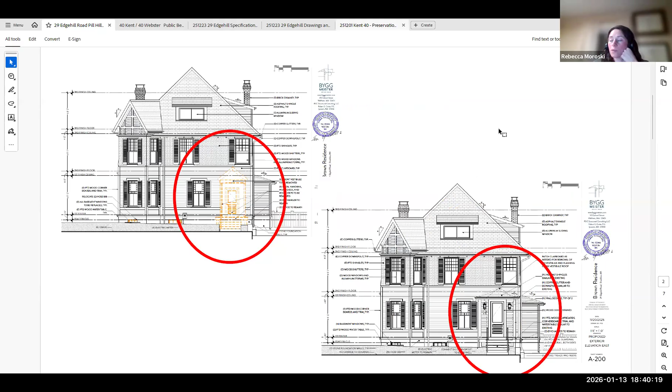Here at the top, we have the existing vestibule, denoted in the orange dashes, that will be removed, and at the bottom of the screen is the proposed new vestibule. Here is a site plan showing the increase in square footage of the vestibule, along with a photo of how it currently looks.

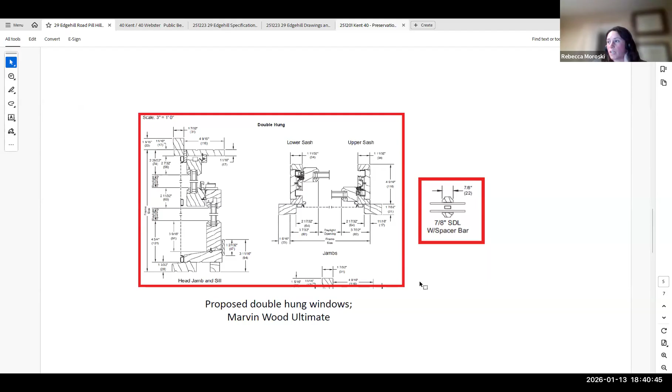Here again are some side elevation photos that also have the materials noted to show what the new vestibule will look like. I've included here the provided specifications for the windows, and here we have the proposed gutter style, shingling style, and door style.

And again, for materials, we have the decking boards that are proposed to be used, as well as the handrail they are looking to replicate for the new construction. At the bottom is the proposed lighting feature. That concludes my presentation, and I do have the full plan set and specification package handy if commissioners want me to pull up anything specific during their discussion.

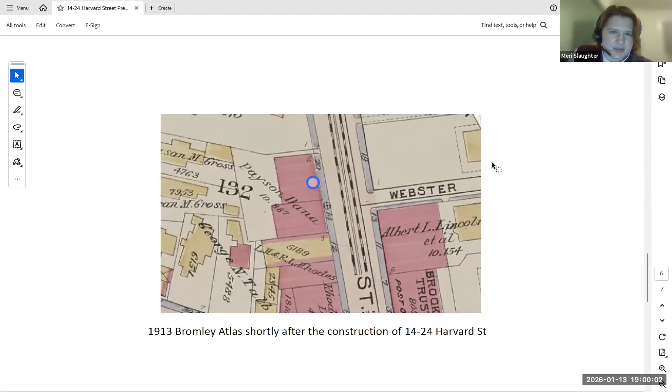Here are some photos of the side and rear that show those arched lintels. Just a quick atlas to show it from 1913 as it was completely constructed. And we were able to see some proposed elevations from that 1990s restoration of the building.

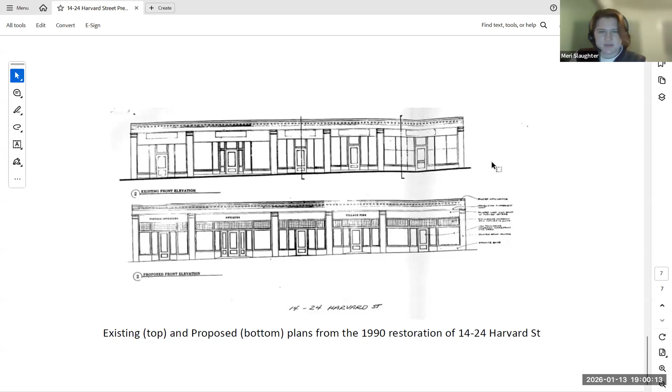And that is what I have for the significance report. I'm happy to pull up anything if you guys would like. And I do believe there are representatives here.

Yes, Bob Allen is here if you guys have any questions or if you would like to speak. Thank you, Meri. Mr. Allen, would you like to speak? If I may, Madam Chair, members of the board, for the record, my name is Robert Allen.

I have a law practice at 300 Washington Street in Brookline Village. I'm here with Richard Tuck, who is the owner of the property. Actually, much of what you see of this building from the exterior, from the streetscape, is Mr. Tuck's doing. It was pretty much changed over in the 90s, and it's now pretty much a group of restaurants.

In order to really have the restaurants work there, the issue was you open the door and the wind comes flying in. So some of the doors had to be recessed to try to figure out a way to block the wind coming in. Before it was just open the door and there were curtains there, and the tenants were really having trouble with it. So I understand it's an older building in an older town, built in 1910.

But if you really take away the work that was done in the 90s, it's a one-story brick building, right? That's just a shell of a building and there's nothing special about it in the back of it or below it or anything like that. And it's time to look at alternative options for the building. Certainly if it's found not significant, it gives us the opportunity to move quicker to look at other opportunities.

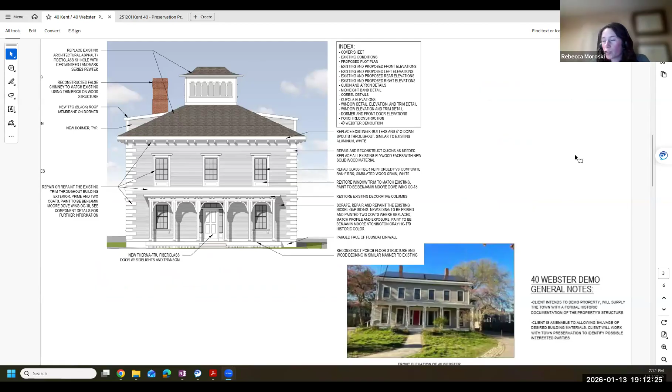Commissioners should have received the preservation package prepared by the applicants. It was the same package seen at last month's hearing. I also have a cover sheet and the 40 Webster building for reference as to what package commissioners should have been reviewing, and some of the language from zoning, which I can pull up if there are questions later or if commissioners want to spend time on it.

Tonight we also have Maria Morelli here to assist and answer any questions. She is the senior planner for zoning and regulatory. And we have a bunch of people from the project team here able to answer questions on the more architecturally specific elements of the preservation package.

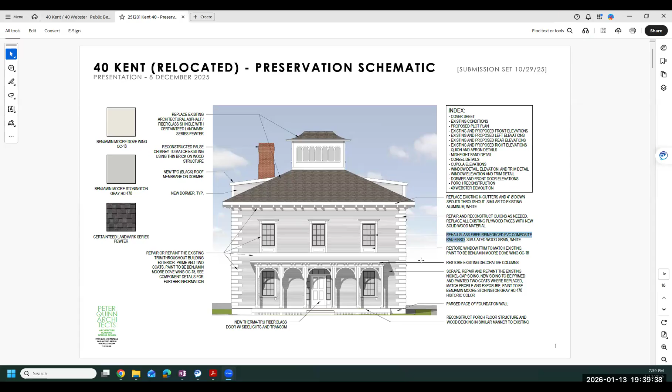It's a set back on the other side of the dormer. Right, yeah, so towards the rear of the site. If you go down a few pages, you'll find it more detailed. One more, I think.

I know the neighbor in the rear would be happy if the chimney was gone. For what that's worth, he's mentioned it.

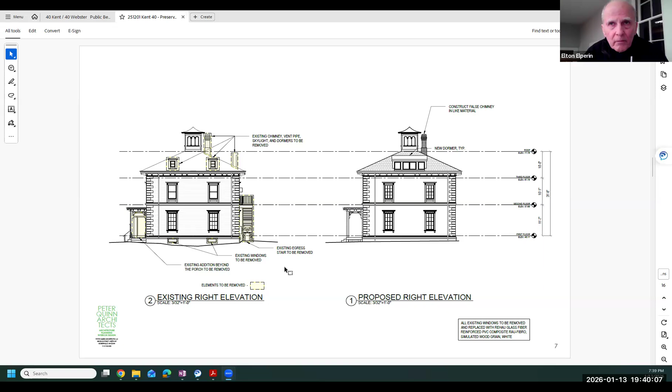I could live without the chimney. I hope Judy Selwyn's not listening to this. You'll have a phone call waiting for you, David.

And I think actually the siting of the building is really an improvement to where it was, because you really appreciate the front loggia. So I think that's a good thing for the building. I would support moving on this tonight and moving towards a letter tonight.

I'm glad to hear that, and I want to poll the commissioners to see if people are on the same page. I'm trying to figure out what's left in the list of feedback that we want to call out in the letter.

One of the only other things I might comment on is the difficulty of the restoration plan as called out. Much of the ornamental work and woodwork is called for basically retaining, but scraping and patching is required. But it doesn't highlight the extent of repair versus replacement. There are some things that may require replacement as the work is done, and I don't know that I'd recommend Fypon as a replacement rather than more traditional epoxy wood fill. That's one of the only other things. I think the intent of retaining as much of that and repairing it as possible is wonderful, and I'm hoping we keep as much of it as possible as good sound old wood.

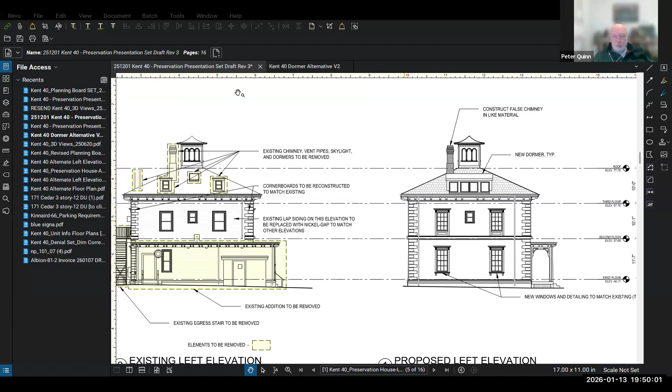We since took a look at this and thought, what if we just left these dormers where they are and try to span between them, maybe with another dormer? Let me just show you what we were thinking about and see if that is acceptable.

So this is kind of a trick of the eye, where the dormers are set up to look like regular dormers, but then there's a wall between them that's recessed behind it. That wall has the roofing material on it typically—it could also have clapboard. We'd like to do it in the wall. If this is a textured asphalt, we would probably carry it up or something similar to it. And then there's a flat roof that links them all back to the hips.

This gives a nice composition to the whole setup of windows and dormers, and also gives us headroom in our layout. So we have the existing dormer here, and then we put a duplicate in the middle and connect them with a raised ceiling. Then we do the same thing mirrored on the opposite side. Just as a quick layout of the third floor—kitchens and other elements haven't been added yet, but you can see there'll be a bedroom back there and so forth.

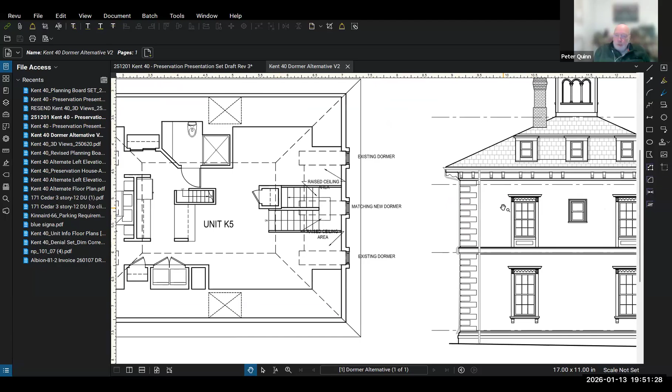And remember, these are also now on the side of the building, not facing the street, so they're a little less visible, and certainly the one on the opposite side you would hardly see, because it's facing the new building. But that was what we wanted to suggest as a response to the comments that have been given by the board, by the commission.

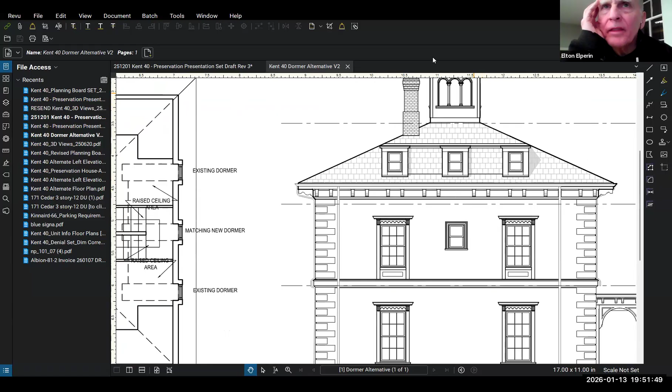I think that's kind of interesting. I mean, is it a very low slope roof now for the dormer? The dormer is essentially flat, it's essentially just... Could they be higher than the previous dormers? No, this is the same height. Same height, same dormer. I see. Yep, but just framed out to match.

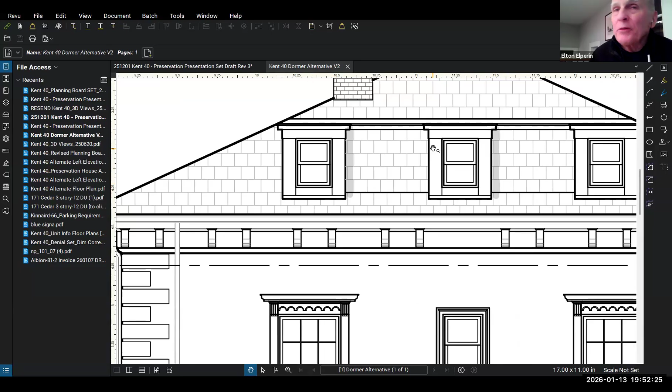By the way, that material is called Boral, B-O-R-A-L, which is wood with a fly ash in it. That makes it easy to make these shapes, and they resist rot and all that. Is it possible to make the windows slightly larger and the casing slightly narrower? You mean to modify the historic fabric? Yes, of course, they could be a little bigger. But what do other people think?

You're saying get rid of the original? I mean, they're preserving the original dormers there. But are they really? How can the original dormers have no slope? Yeah, they really don't. I've looked at it - it could be like a sixteenth of an inch, or a little crown in it that you can't see. I think that's one of the odd things in the new elevations, that the shed slope is so prominent. Maybe in reality it's not, because seen from the ground, it's the trick of the elevation.

When you look up, you can hardly see it. Peter, are you getting adequate head height and thermal performance of the roof there? Yeah, the floor level is actually quite a bit lower down here - much lower. So these would be almost functioning like, you know, you fit a bed underneath it. That kind of height.

Could you show the old scheme as well as the new one? Just give me a second. This being the old scheme.

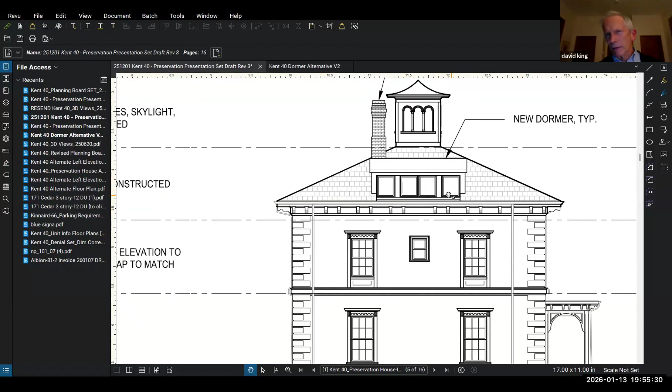Isn't the older dormer thinner? The old one was 13 feet across - it sort of lines up between the windows. This one goes to the edge of the windows, the new one goes to the edge of the windows. So from the front of the building, wouldn't you perceive the altered one more than the original one? It's closer to the existing condition though.

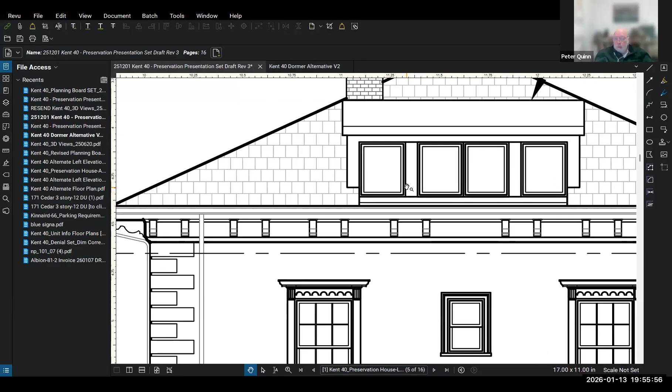I think this one may be missing a little bit of trim here, at the corners. But we were changing the slope to be a little steeper. The whole new dormer - the old dormers, which are right here, would be removed and the roof would be rebuilt.

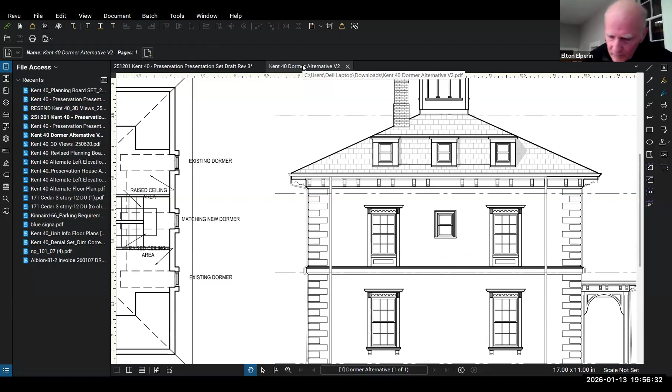This that we're looking at now is such a different animal than that. I think this kind of odd triple arrangement is better - it's more in keeping with the historic house. Nice to have the windows relate to what's below. This whole thing really is built on these simple symmetries, all through the whole thing.

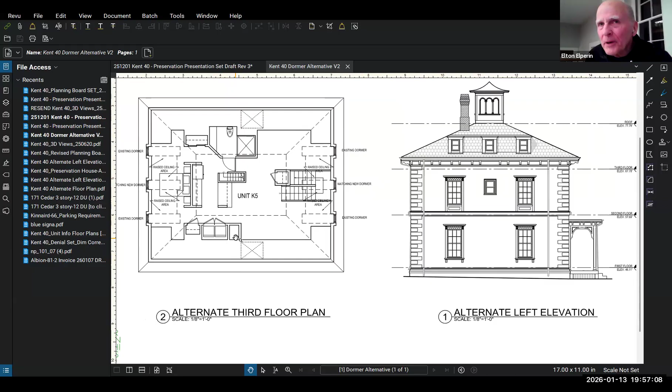Well, if it's enough light for them up there in their bedrooms, I think it makes us happy. This cupola up there - is that gonna give light? Oh, really? So you have glass up there behind it - what do you have, a skylight? The arches actually have glass behind them. Wow, good Lord. Is there an amazing space up there? Is there a stair up there? Yeah, there is.

Good rental unit for you someday, Elton. Couldn't afford it - give me a call.

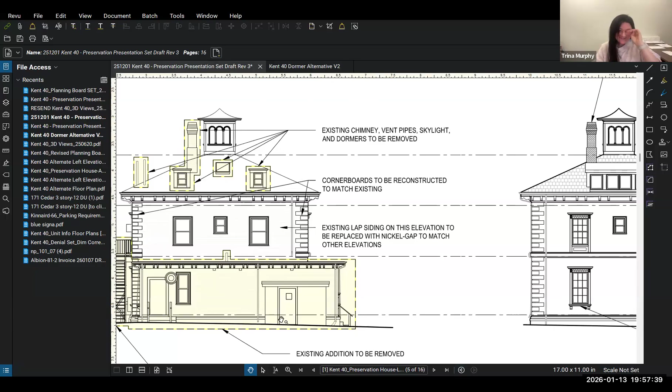Okay, where are we - is there anything else, architects or other commission members? We have this nice opportunity where we have the architect to explain things to us. Anything else we want to get into before we move forward on this? We've talked about the dormers, the desire to move the property slightly over which would be difficult, the chimney, and the windows.

Do we need to talk about how the awnings relate to one another? That was something that was brought up as feedback. Can we see that? Is that in somebody's drawings - you mean the 3D model? Okay, yeah, just give me a second.

These are not fully rendered models, just more like massing models. But this is our envisioning of the plaza without landscaping in place.

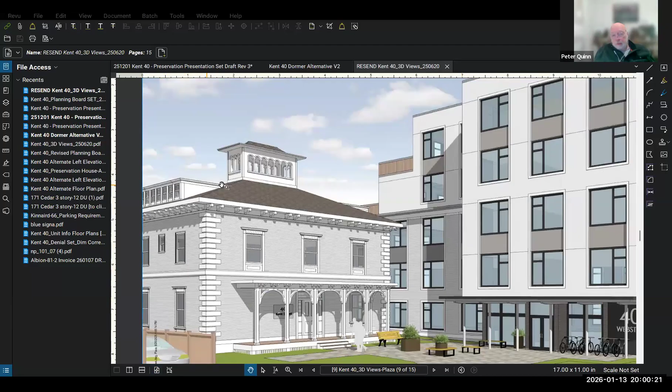By the way, you can see the dormer that we were originally proposing off here, and even with the added slope, you don't really see the top of it.

I don't know what the right solution here is, but you have the lower awning on the higher building and the much more elaborate detailed awning on the historic building, which I guess makes sense. But I think we're worried that if we brought the new building up here, we would immediately start to dwarf this.

I think if you look at it from the point of view of the pedestrian, there really is a hierarchy between the two—the historic building has the greater presence in the plaza. But you know where the entrance to the main building is. It's kind of doing both things at once.

When I first saw this, I wondered if you could go awning-less in the new building. You do have a recess to the doors, and then there's a projection of the entry vestibule that could maybe be reduced a little.

I know you like the idea of the columns echoing the columns in the historic building. Do you think they compete to the detriment? Maybe it's okay.

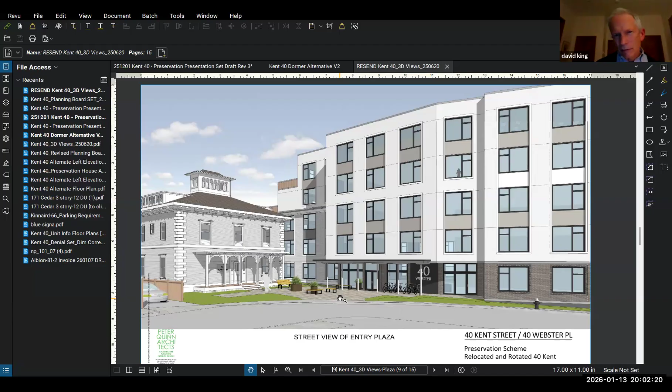I just think it looks kind of bare, the new awning. Maybe it's just a question of how it's detailed, and maybe it'll be more elaborate and interesting as it goes into construction drawings. It's definitely a very simple schematic, and the other one looks so ornate.

Well, I think the whole entry facade could evolve and become more elegant. Maybe it would lose its canopy and its columns and become something else, because I've certainly seen modern entrances which are extraordinarily beautiful.

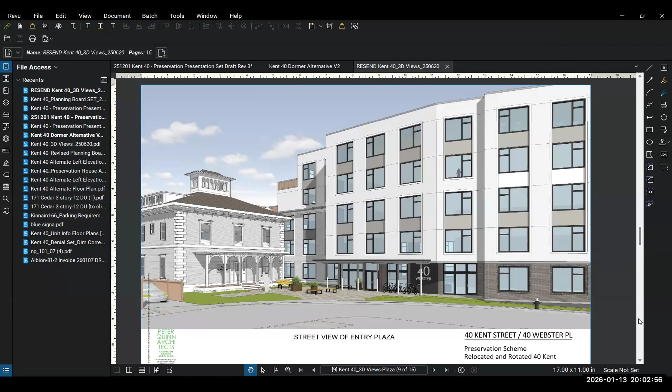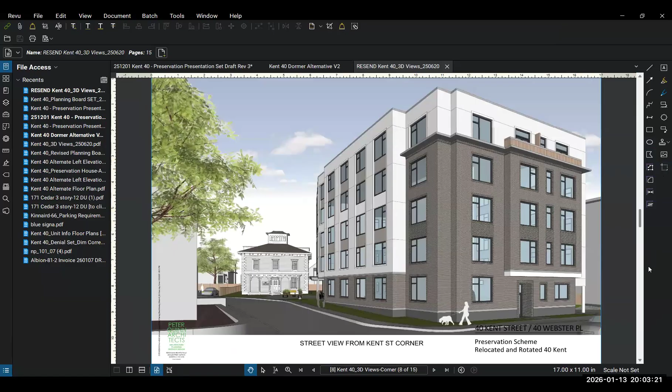I think the DAT has had a number of iterations of this condition—this is maybe not the last one or the favored one, but I think it's interesting to hear this response to it. There's been some study of this, and I think it's worth noting. I'm not sure where we're at in terms of making everyone satisfied with it.

I think it's really close, but maybe the door should be higher, the mullions thinner. It's just, I don't know, the projection of the vestibule—you need the airlock, I guess, but I don't know.

We could have the planning board revisit that. I want to echo what Peter Kleiner said, that there was an effort to make the new building a backdrop to 40 Kent.

So it would not compete with it in terms of the hierarchy of the canopies, but actually have elements that would speak to each other so that they would look associated. Because if you look down Webster Place, there is kind of a welcome to this building—that canopy announces it's a residential entrance and a welcome to the people who are going to be occupying that residence.

But I think what's important for us to hear is whether anything about that canopy is competing with or overshadowing the historic structure, because that will be key for the planning board and the ZBA to hear. But we can also take your suggestion about revisiting the relationship of these two canopies.

No, I don't think it overshadows it. Okay, that's important to know. I think it is competing, but I'm not sure—have you tried it without the canopy? Yeah, we have, and it's just kind of like a lack of presence.

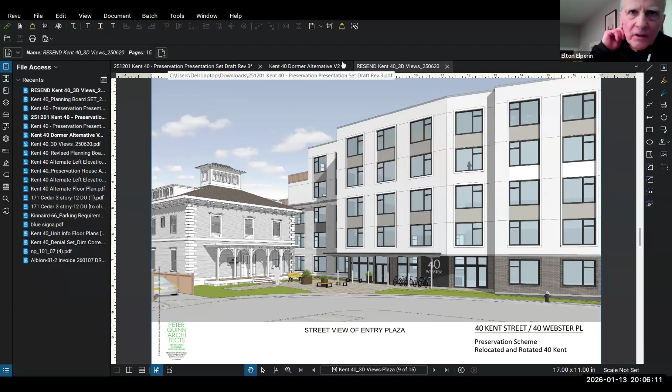You might also not be seeing the landscaping. There's really a beautiful landscaping plan that is complementing this work, and that might also soften and integrate these two structures as well. I just wanted to point that out.

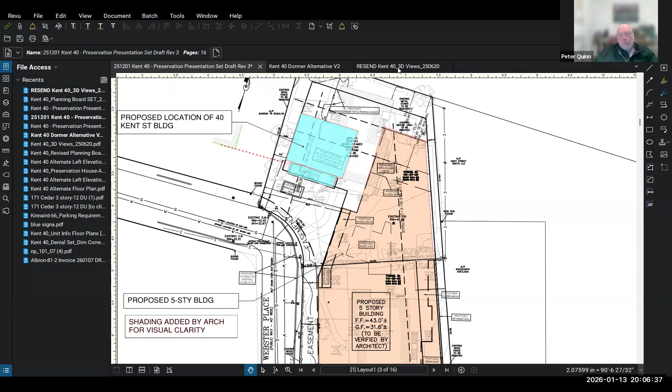And Peter, you wasted no time in getting rid of that chimney. I think my drafting staff is saying, no, we're not doing chimneys today.

Well, I'll ask the architects on the project—you have the commissioners here, are there any questions you want to ask us? And there don't need to be any. No, I don't think so. Okay, we got your feedback and we tried to address what we could. Yes, I think we've got a lot of good information.

All right, very helpful. The process has been very helpful. This was what we were missing last month, and I'm glad we were able to get to it tonight, and I'm sorry it had to be put over. Let me take it just to the commissioners for a moment so we can have a go around and see where we're at. Are people okay with the idea that we're going to move forward and write a letter in support, laying out some of the feedback we've given, and it sounds like this won't be the final word—perhaps we may or may not see this project again. Are we on the same page with that?